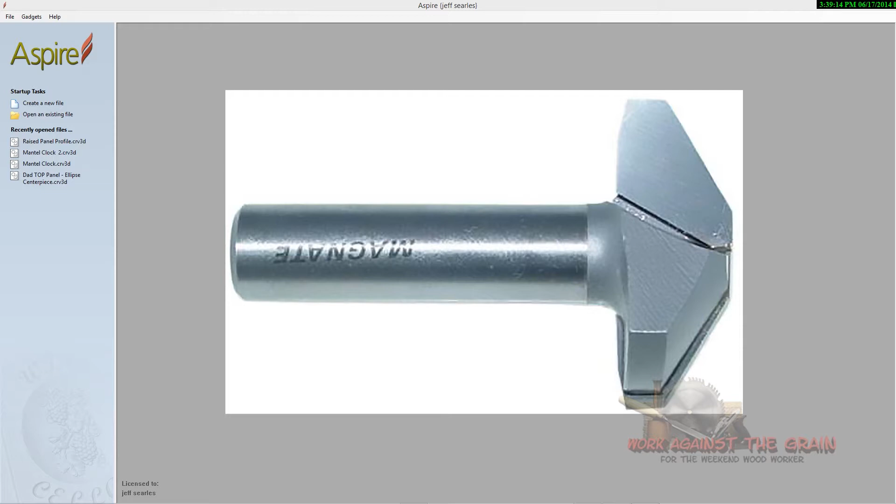And so what I did was I created my bit first, and this is the bit here. It's a 40 millimeter raised panel bit from Magnate. And I created the bit in Vectric, and then I wanted to lay out the doors. So let me show you what we're going to do. We're going to create a new file here,

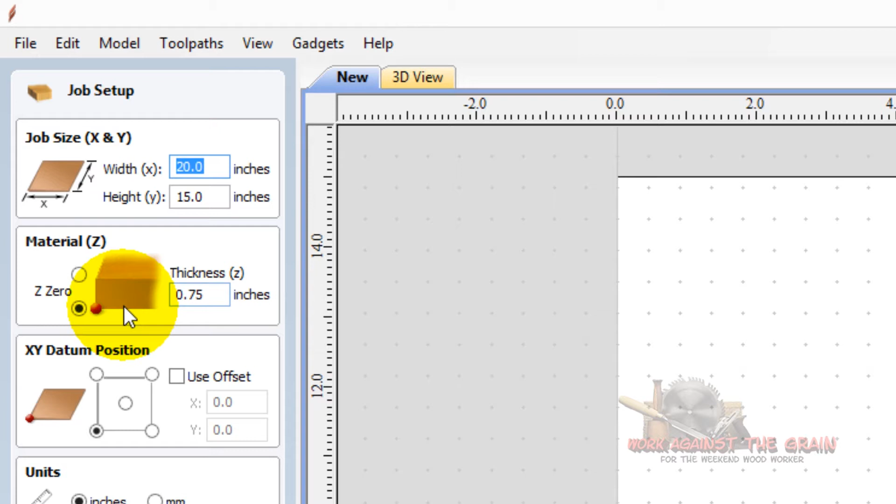and I'm going to go ahead and use X 20 inches, 15 inches, 3/4 of an inch thick. We'll put 0 on the table, XY datum in the lower left corner. Let's work in inches, very high resolution. And let's use a kind of a cherry or a lighter wood. We'll go medium wood's fine, and click OK. So here I have the piece of wood that I want my drawer front to be cut from.

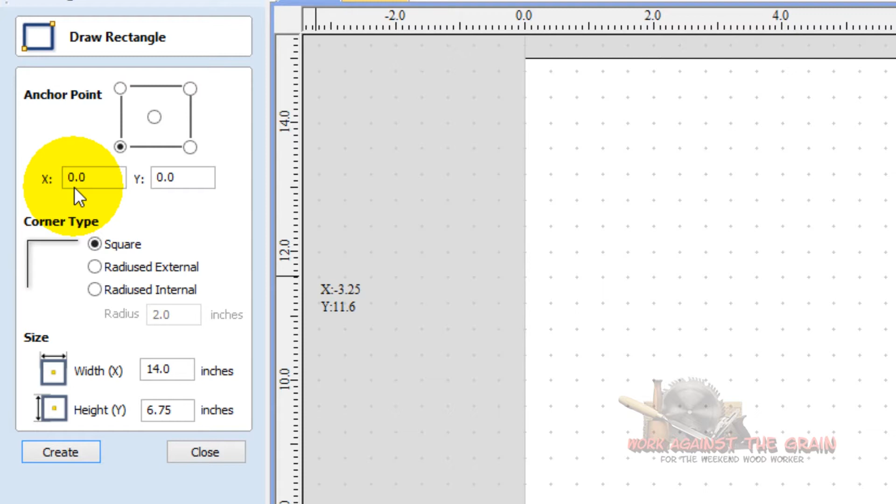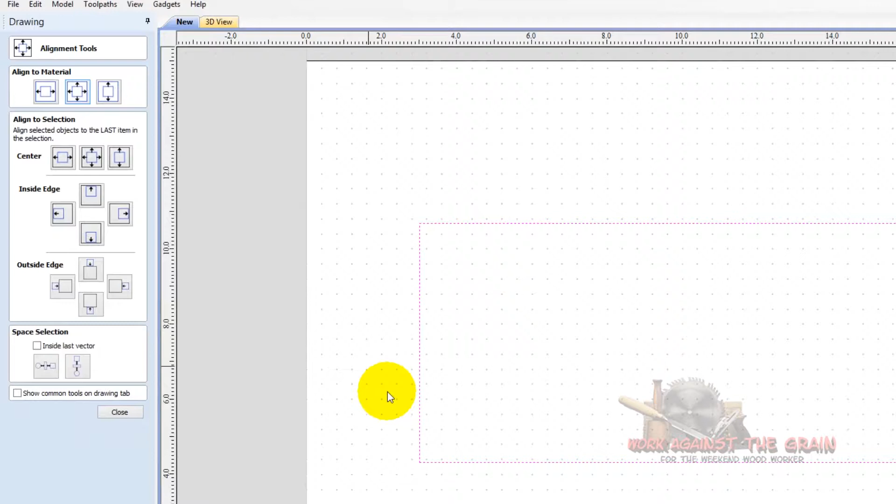So the first thing I want to do is come up here and create my drawer front. So we'll start out X0, Y0, and I know that I want the width of my drawer to be 14 inches. And I want the height to be 6 3/8 of an inch. And so I'll go ahead and create my drawer front. And we'll center it into the middle of the workpiece so that we can see it. So now I have the profile, if you will, of my drawer front, but I want to create a raised panel drawer front. So how am I going to do that?

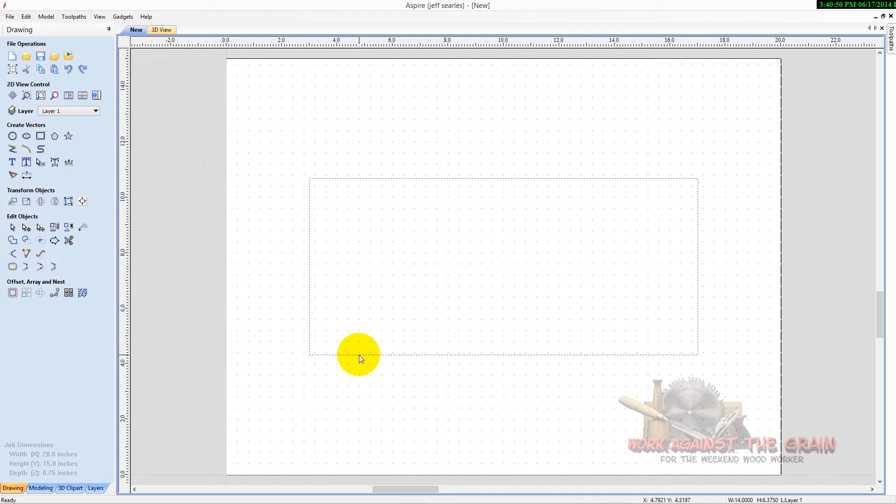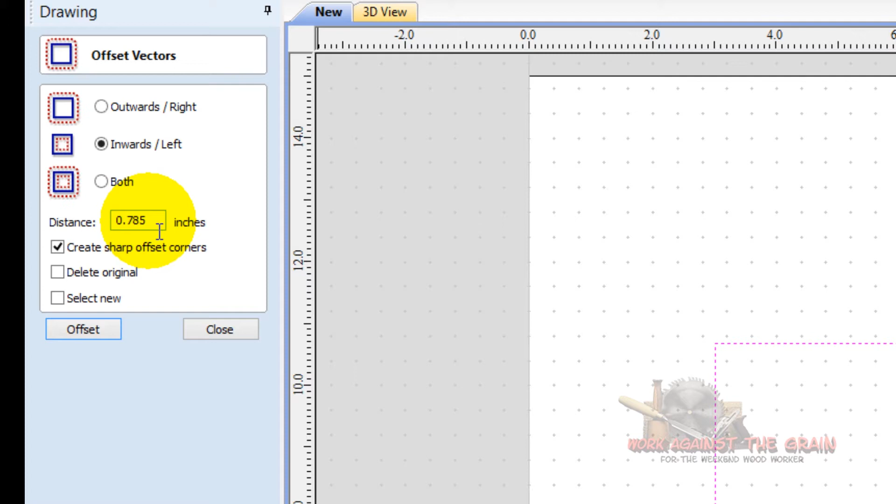Well, the first thing I need to do is give it a vector in which the form tool can cut alongside. So if this is the outside of my drawer, then what I'm going to do is come over here and offset a vector, and I want to go inwards half of the tool diameter. Now, the 40 millimeter tool equates to approximately 1.575 inches, and I'm going to take half of that and go 0.785. I'm going to create sharp offset corners, and I'm going to offset, and then I'm going to click close.

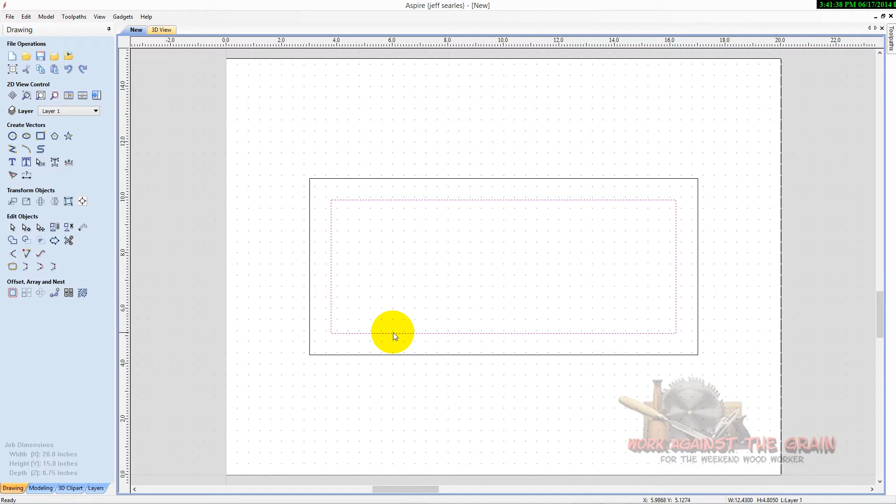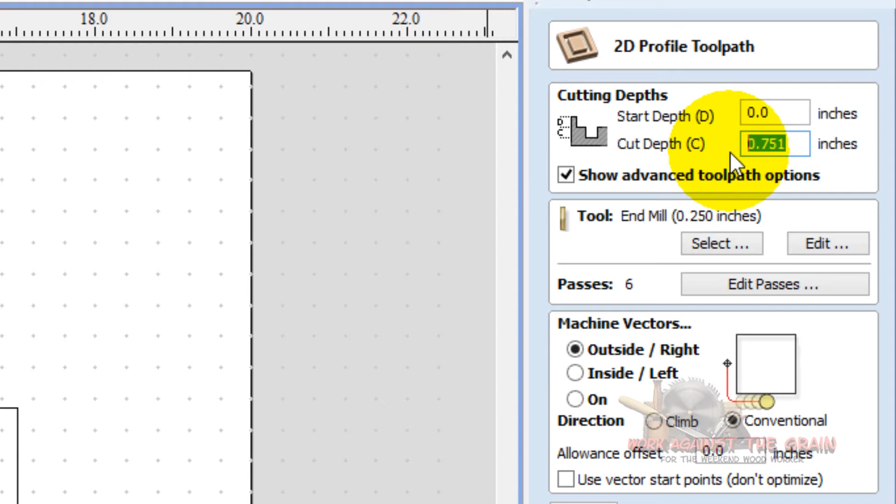So now I have the outer perimeter of my drawer front, and then I have the vector on the inside that I'm going to utilize to machine the raised panel portion. So let's come over here to our tool paths, and we'll do this one first. It's not a pocket tool path. We're going to create a profile tool path. We're going to start at 0, and the cutting depth on this particular tool is about 0.2 inches. So we're going to cut 0.20 inches deep. And let's select here our 40 millimeter raised panel tool.

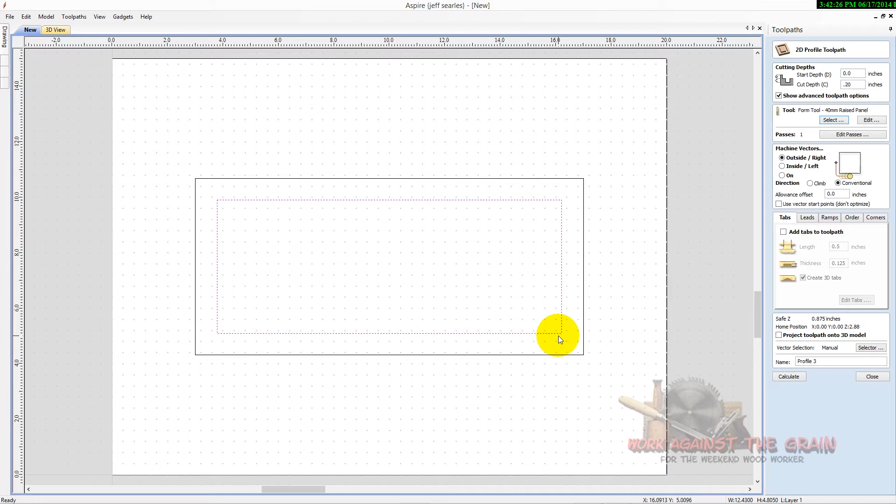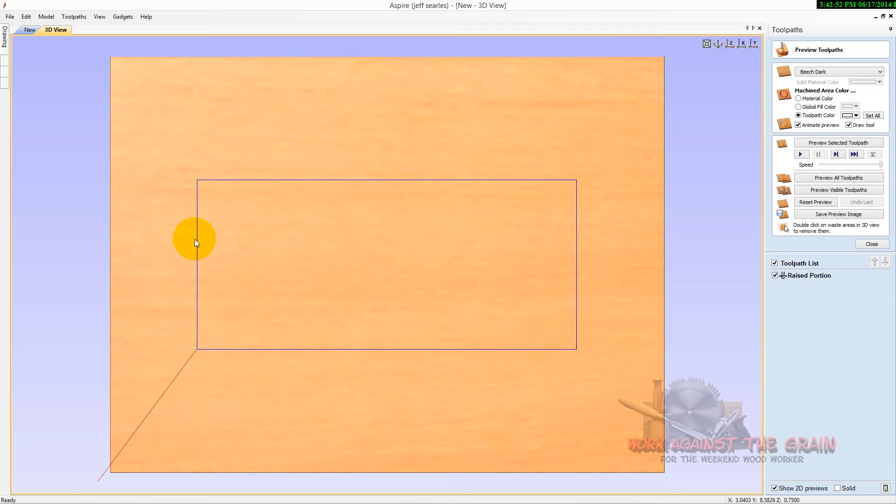Okay? And click OK. And if you don't know how to create a form tool within your tool database, Vectric has a wonderful video on how to create those, and I will also be putting a video up on creating those here shortly. So now I know I want to go outside of the vector. I don't want to go inside, I want to go outside. I don't need any tabs, any ramps or leads. And I'm going to name it raised portion and select calculate.

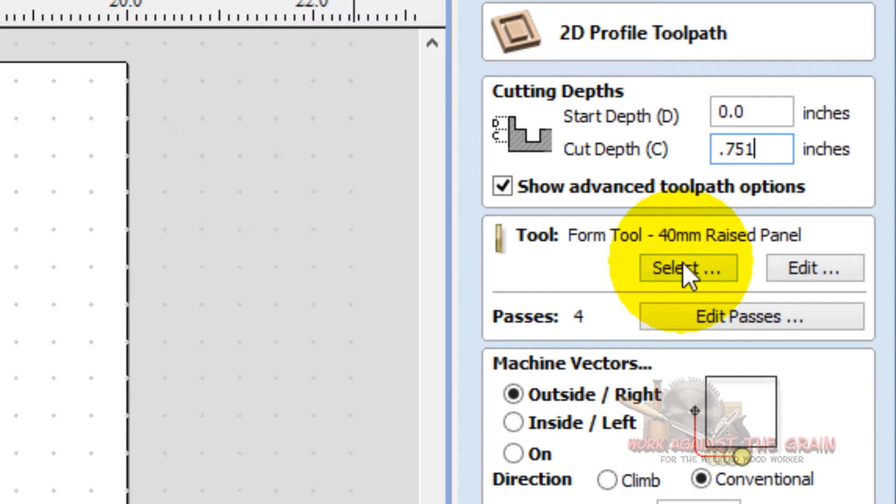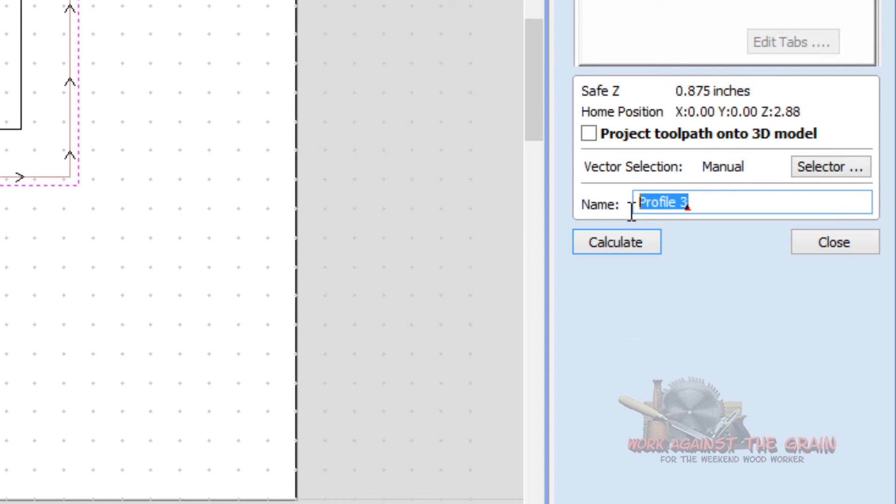So now I have the tool path generated for my bit, and now I'm going to come back to the vectors, turn that one off, and turn the profile for my actual drawer front on. Let's do a profile cut because I want to cut it out. And let's cut completely through the material at 0.751. This time we're going to select a 1/4 inch end mill, select OK, and again we want to go on the outside. I don't need any tabs, lead, ramps, order, or corners because I'm using a vacuum table. If you don't have a vacuum table, you're going to want to add tabs to the toolpath. And we'll call this drawer front cutout. And calculate. It's letting me know that I'm going to cut all the way through the material, which is fine.

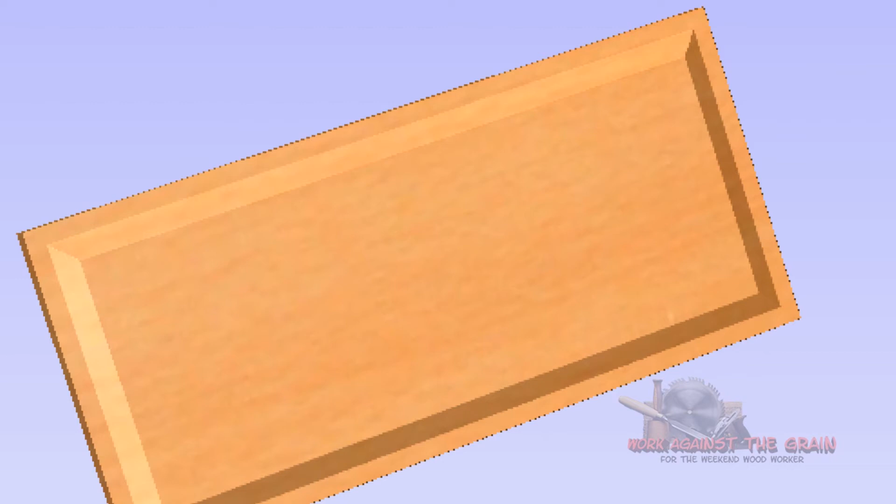Select OK. So now I have the two profiles, so I'm going to preview all of my tool paths. And it's quick, but as you can see there, as I delete the waste material, I'm left with a very nice raised panel drawer front, utilizing two real simple vectors. If I look at my anticipated time, it's going to take about a minute and 27 seconds to cut that drawer front out.

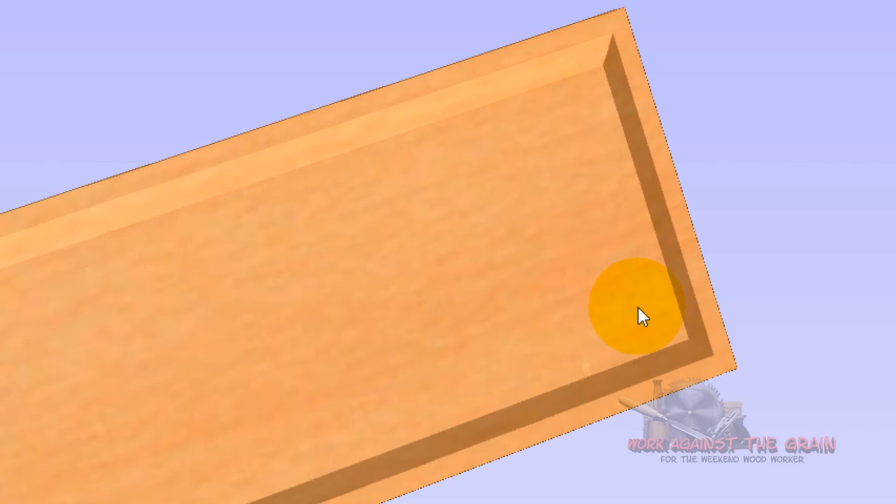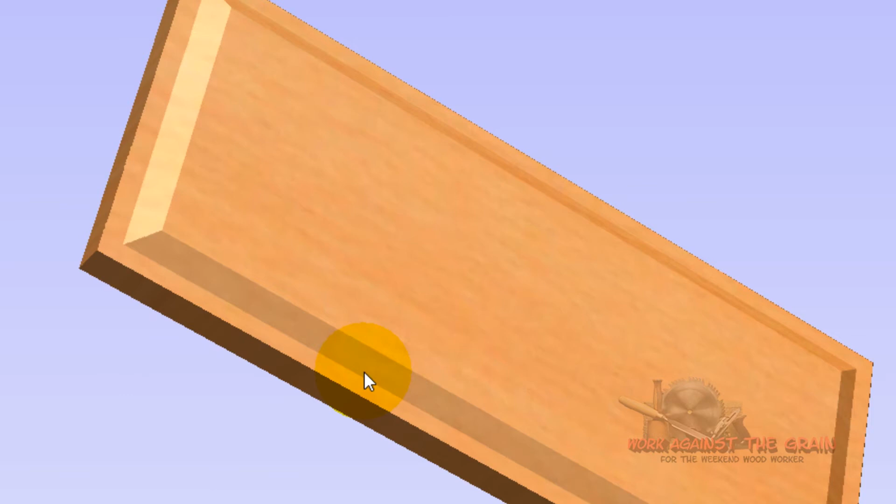And as you'll see in the upcoming video, I cut a whole bunch of these, various sizes, various drawers, and I'll show you some pictures of what the cabinets look like and how it turned out. But I have to tell you, with the form bits, and I'm going to come back and show you here in the next couple of weeks how we can use some ogee bits to make some jewelry box bottoms that have nice ogee round over details, etc. Some of you may continue to use a roughing tool path and a 3D tool path to get this same shape. But utilizing two real simple vectors and the greatest software in the world, Vectric, you can create some really nice raised panels for some drawer fronts.

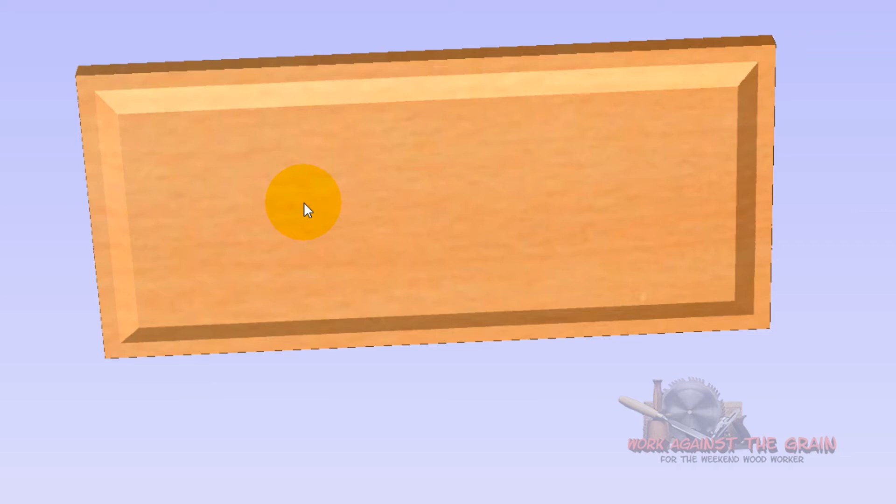So have a look at the video of the drawer fronts being cut out.